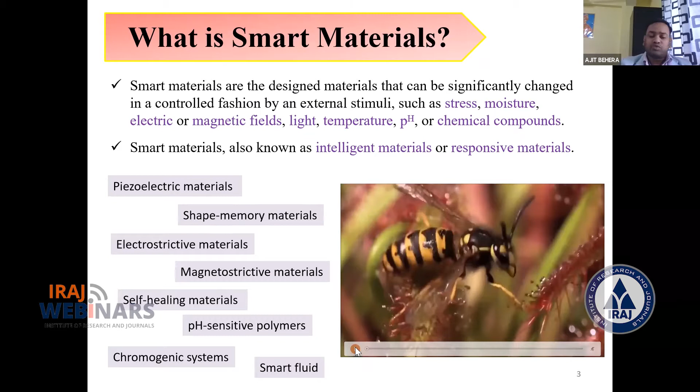Okay. So what is smart material? Just before the definition, I will show you a video clip here. You observe how nature gives an indication of the smartness of different types of material. So in this video, you observe that when there is a force or stress experienced by the surface of that plant, then according to that stress or pressure on the surface, it will close. Okay, that is called smartness. According to the force, it will close its petals.

The same thing will happen in the case of material, right? So as per definition, smart materials are designed materials that can be significantly changed in a controlled fashion by an external stimuli. Here in this video, the stress is an external stimuli. According to that, it will actuate. In the case of material, different types of stimuli are there, that is stress, moisture, electric field, intensity of light, temperature, pH change, and chemical compound. By these stimuli, the material will experience and actuate accordingly.

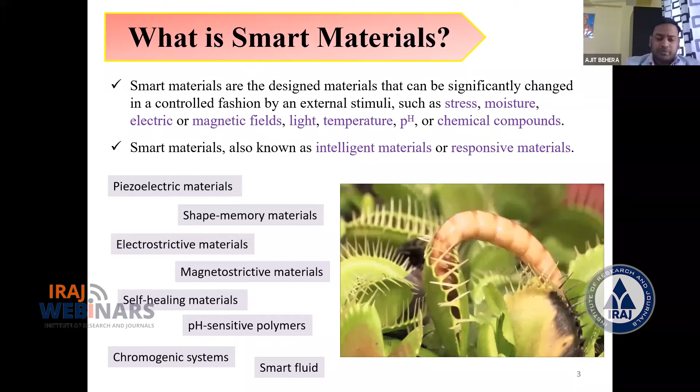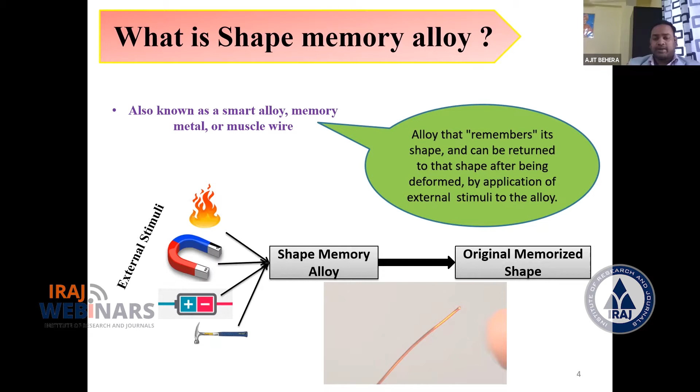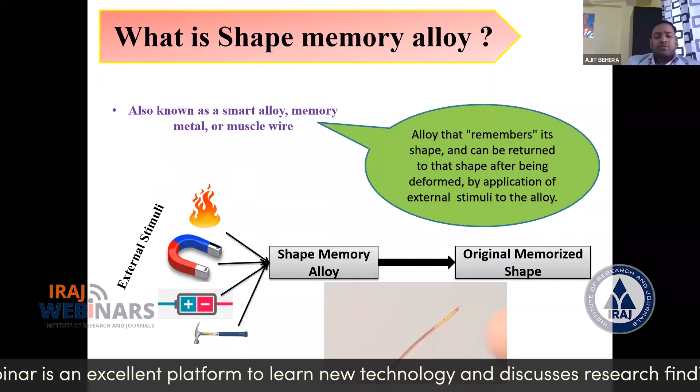So what is shape memory alloy? As its name, it memorizes shape. These are alloys that remember their shape after being deformed, by the application of external stimuli to the alloy. This type of alloy is also called memory metal, muscle wire, or smart alloy. Before going to the definition, I will show a video clip here: what is the difference between conventional alloy and shape memory alloy? Suppose we take a brass, and if we give force or deform it, then what happens?

Then it will be like that. But in case of shape memory alloy, if we deform the material, then it will come back to its original shape. This is a type of pseudoelasticity nature of shape memory alloy.

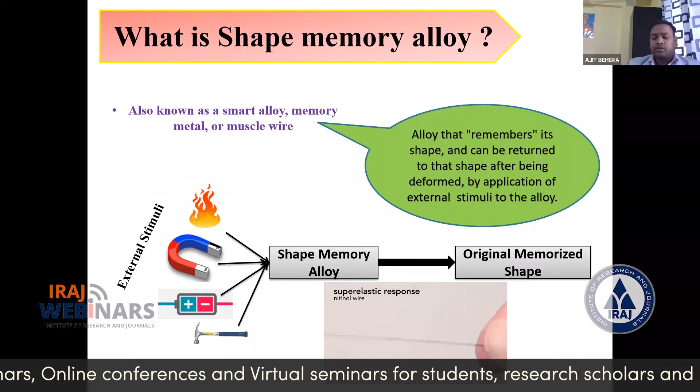Okay, here in this video, you saw that when you give some amount of pressure here, or we want to deform it, then it will come back to its original shape. Okay. This is the beauty of this type of shape memory alloy.

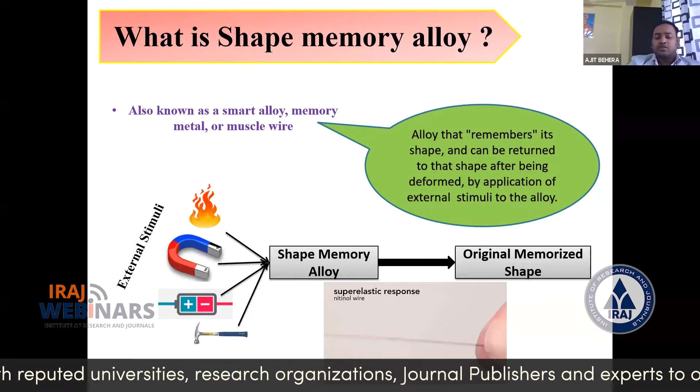So as per definition, shape memory alloys are the alloys where, if we give some amount of deformation, then to that deformed dimension, if we give some external stimuli, that is thermal energy or magnetic energy or electric energy or sometimes stress, by the help of this external stimuli, we can recover its original shape. Right. This is called shape memory alloy.

So, what is the potential property or function of shape memory alloy? Why are we not going to use different types of smart material? Because so many types of smart material are there, in the current age, all types of smart material are used in sensor and actuator applications, right? But why will we choose shape memory alloy?

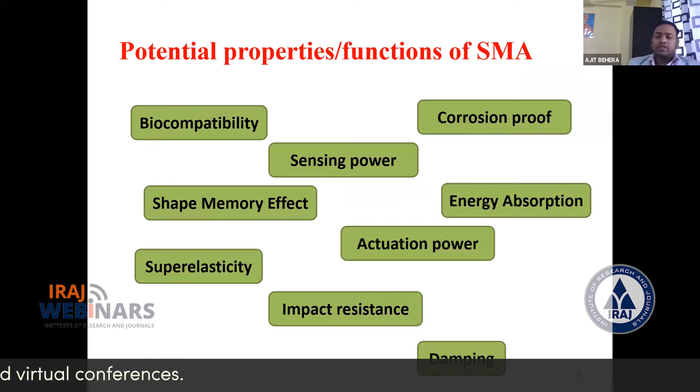Rather than other types of material, because of these advantageous properties. The first one is biocompatibility. Okay, shape memory alloy, the first one is biocompatibility. So most of the alloy is biocompatible in nature, because it will not produce any type of toxicity if you implant it in different types of biomedical applications, right?

And another one is corrosion proof. Most shape memory alloys have a composition such that they give better corrosion resistance property, right? It has better sensing power, and accordingly it will have energy absorption capacity. Accordingly, it will actuate. Okay, then it has high impact resistance, good damping property, right?

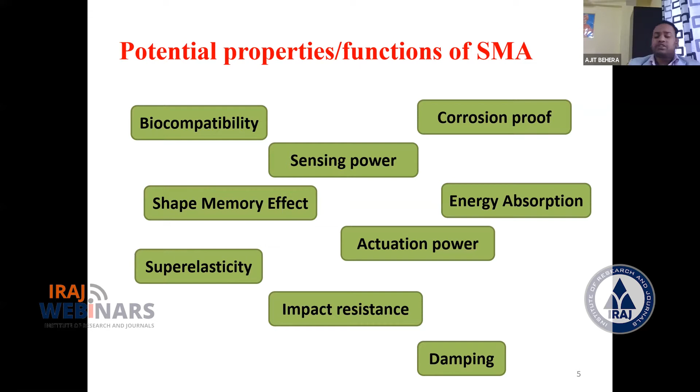And in addition to these properties, we can get two types of peculiar properties, that is shape memory effect property and pseudoelasticity property or superelasticity property. These two are the main properties of shape memory alloy. By these two properties, we can apply it in different types of application. We will discuss this in this presentation.

So as compared to other smart materials, when you compare actuation stress with respect to actuation strain, then you can get shape memory alloy here, right? So think about that. Why will you not go for shape memory alloy when the conventional smart materials are used?

Suppose I give you an example, that is in actuator application to produce some sound in a sonar transducer. There we can use piezoelectric ceramic type of material. But in that actuation case, if we operate with temperature induced or magnetic induced shape memory alloy, and we actuate the dimension in such a way that it can produce the desired frequency of wave, we can use it. Definitely we will get a better result, right?

So what is the main thing? What is the main principle behind the shape memory alloy, so that we can use this type of alloy in different applications? So here I will show you one application for shape memory alloy. Then according to this application, I will discuss the fundamental thing behind it. Right. You just observe here.

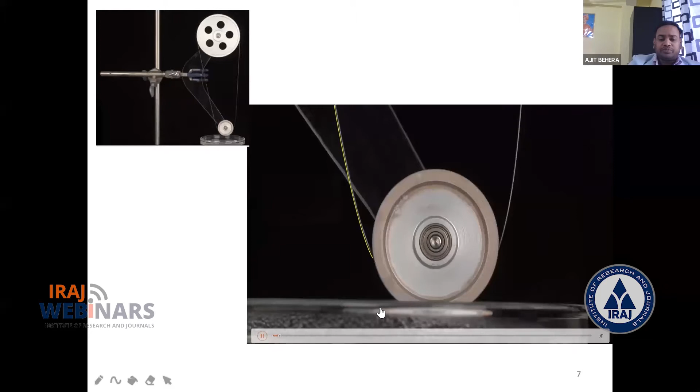So what happened with this type of material? Right, no other external source is there to rotate this wheel. Even so it rotates when it touches the water. What is the fundamental thing behind it? Right. So we'll go to the macroscopic and microscopic view of that wire, which is connected with these two wheels. Okay, what happens inside that material, so that without any source we can rotate a system.

So to understand that one, I will tell from the origin. Suppose there is a straight bar, a shape memory alloy bar. Suppose you can consider it is the original shape, right? And here you are deforming the material. Suppose in the second step you are deforming the material. This is the deformed shape, right? Consider this is a deformed shape.

So here you want to come back to its original shape. So how will we recover this shape? If it is a temperature-induced shape memory alloy, then you have to give heat as an external stimulus, right? So at a higher temperature, you will recover the structure, which looks the same as the original, but microscopically, when you observe, it is not equivalent to the original shape, right?

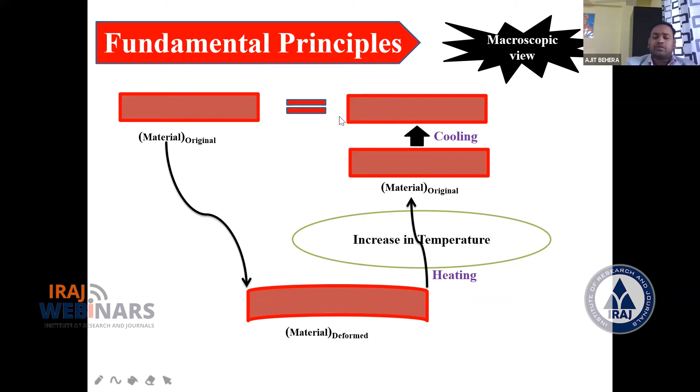Remember. So this hotter shape, in this step, you have to cool it. By cooling, you will get the same shape, but microscopically, it will arrange the same as the original shape. Now you can say the cooled shape is equivalent to the original shape. Okay. So what is the difference between this hotter shape and the cooler shape? Here we'll go to the atomic arrangement in this material, right?

Suppose this one is a low temperature, undeformed shape. You can consider it is the atomic arrangement in the original or initial shape, right? And the undeformed shape, in case of shape memory alloy, is always a martensitic structure, low temperature shape, martensitic structure. And in this martensitic phase, the atomic arrangement is just like a twin. You know, twin is a surface defect for conventional material. But here, in case of shape memory alloy, you can consider this atomic arrangement just like a twin-like arrangement, right?

And when we apply stress to deform this low temperature undeformed martensite, what happens? The atomic arrangement will again form twins, because the original or initial shape is a twin-like arrangement. Again we give deformation, again it will form the twin. So it will form this type of shape, just a rhombus type of shape. That is called detwinning, detwinned martensite. Because all the deformation we are doing without temperature; up to this step, we are not giving any type of stimulus. So at that low temperature, this is also martensite. So after deformation, the structure will be like a rhombus, right?

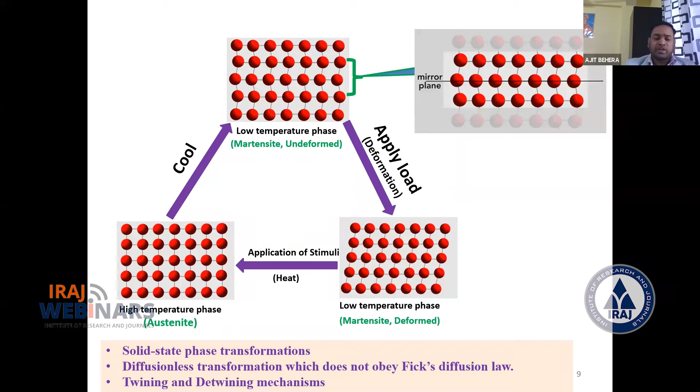One person's movement is equivalent to the surrounding persons' movement. The same thing happens in shape memory alloy, very coordinated movement. That's why it is called military transformation, right? Whatever I am showing here, in case of shape memory alloy, the atomic arrangement and atomic movement or displacement, everything will be in a coordinated manner. So here everything is explained by that. That is military.

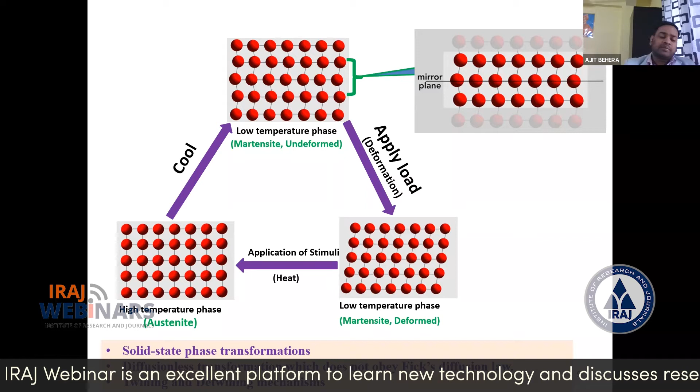And here no diffusion will occur, so Fick's diffusion law will not work here. And in this mechanism, the conversion from low temperature martensite to high temperature austenite, the twinning and detwinning mechanism will also play a big role. Right.

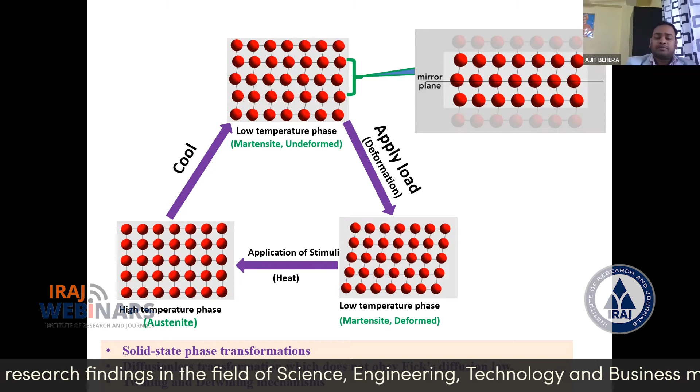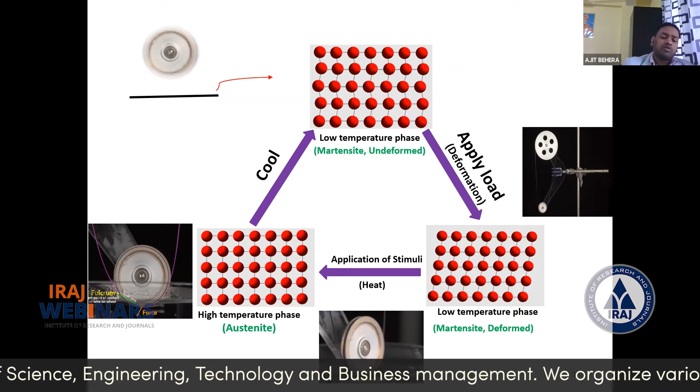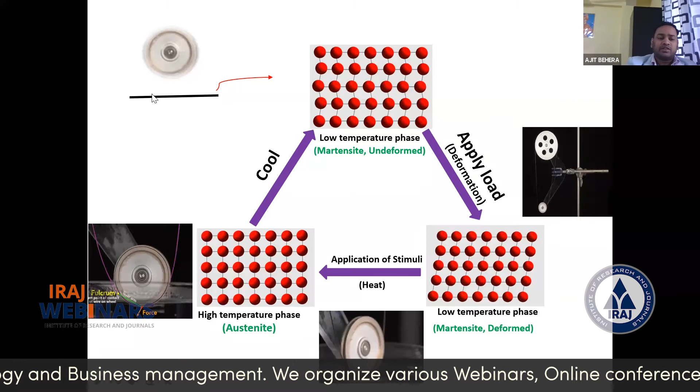So come back to that application. I have shown you how, without any external source, with the help of hot liquid, we will rotate a wheel. Right. So just compare. Suppose the shape memory alloy's initial shape is straight. Okay, initial shape is straight, and this initial shape is a martensitic phase. Okay, twin-like structure.

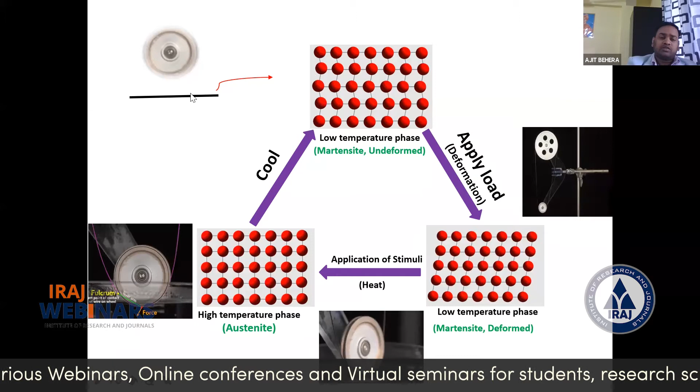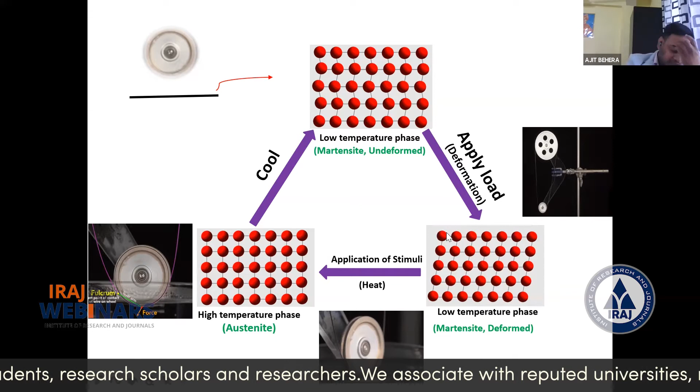And now you have to wind this wire with this wheel. So you have to deform it by applying load, and you will fix it in between these two wheels. Once you are deforming, suppose these are straight, but here and here it is in deformed condition. So it is a shear dominant transformation here.

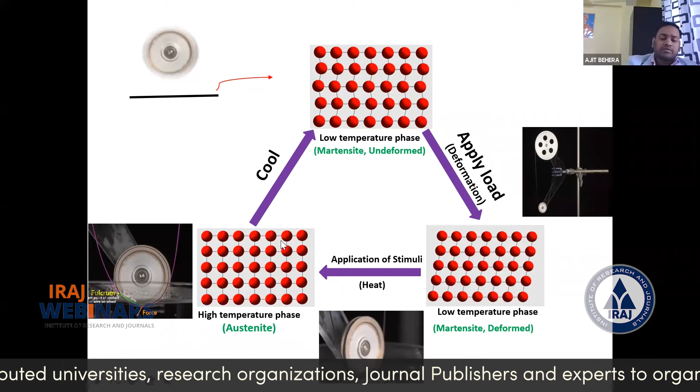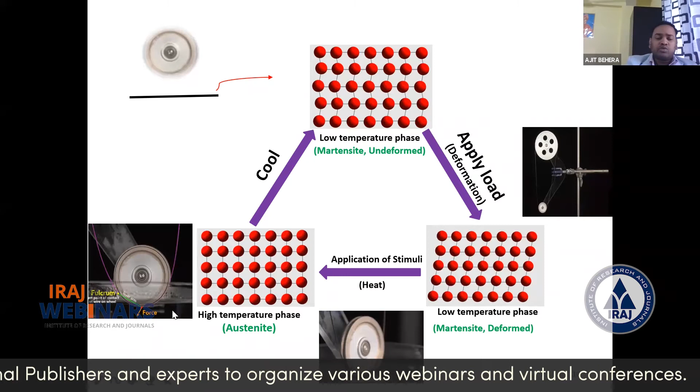And here, when it touches the external stimuli, that is temperature in the form of water liquid, then what happens at higher temperature? This shape will transform to the cubic shape. Once it forms the cubic shape, it will try to attain the microscopic dimension that is the same as that of the original shape. So it tends to become straight, right?

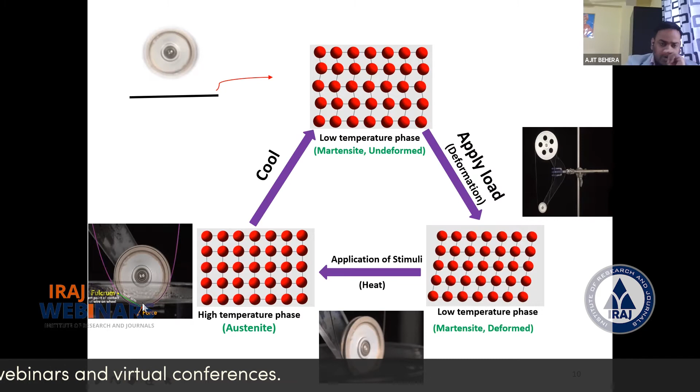So this line, when it is exposed to the hotter stimuli, wants to straighten. So it will pull and come to this side. Sequence-wise, whatever portion comes in contact with the hotter liquid medium will go in that direction to become a straight line. So in this way, we can rotate the wheel. This is the mechanism of shape memory alloy.

So whatever deformation you give for different applications, it will rotate towards the left side or right side according to the deformation or structural arrangement of that system. Whatever external stimuli you give, as temperature, it will form this cubic shape. Okay, it is final. After that, it will straighten.

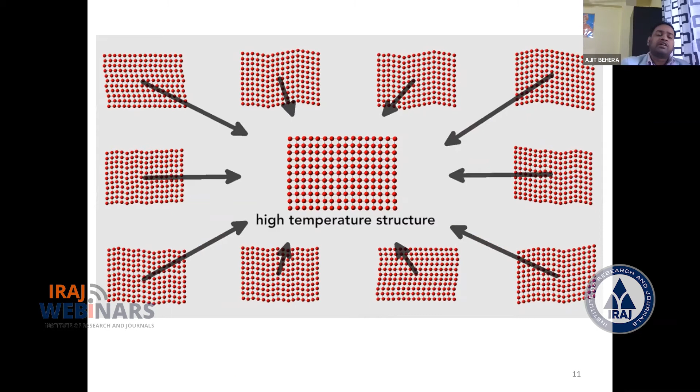So here it is the high temperature phase, that is austenite, and this is the low temperature phase, martensite. The shape change, this actuation mechanism, straightening or coming back to its original shape, all of it happens between the high temperature and low temperature phases, austenite to martensite or martensite to austenite. Right.

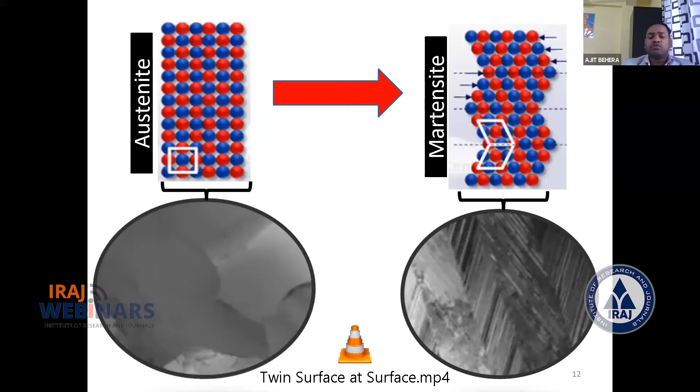What happens for a shape memory alloy in the case of pseudoelasticity or superelasticity behavior? Suppose its initial shape is one phase, and by giving stress, it will go to another shape. Again, it will convert back to its usual shape. Okay, I will show you a video here.

This is pseudoelasticity nature. This is smooth, that is the austenitic phase. Then when you give pressure, it will form the martensite phase. Again, by relieving stress, you will again get a smooth type of surface. Okay.

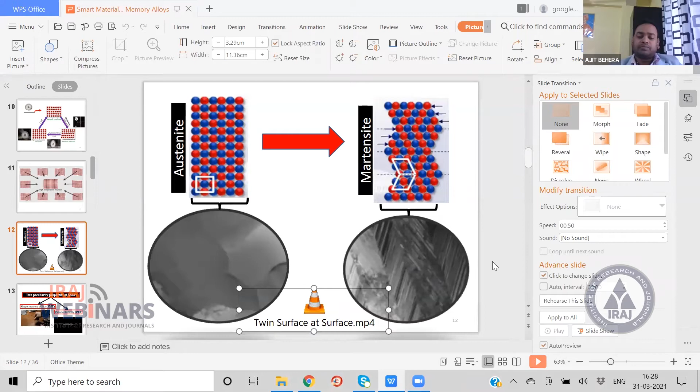So another peculiar property of shape memory alloy we'll discuss here, that is shape memory effect and pseudoelasticity, also called superelasticity. You can observe these two properties in different applications of shape memory alloy. What is shape memory effect? What we discussed in the previous slide is shape memory effect. After deformation, when you give some external stimuli, it comes back to its original shape. That is called shape memory effect.

What is superelasticity? Another behavior. For this type of application we have to train the material for martensitic to austenitic transformation, and we have to maintain the working temperature just above the austenite finish temperature. At that temperature, whatever stress you give, it will change from austenite to martensite. Then it will come back from martensite to austenite.

Okay. I will show you some video of these two properties. Then again, I will discuss how these two behaviors are distinguished by the stress and temperature diagram. Then it will be better to understand.

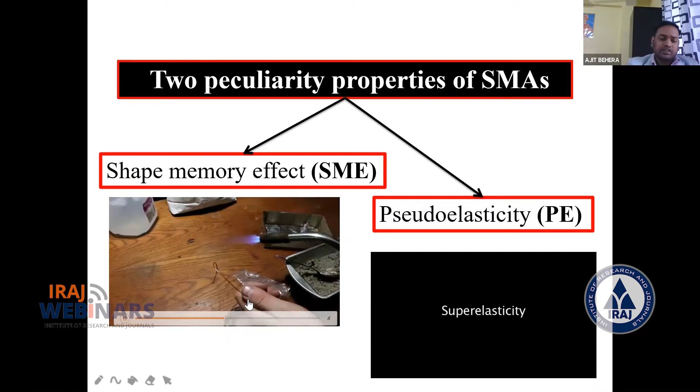For shape memory effect, suppose this is the material. He deformed the material, and externally he will give some heat to recover its original shape. This is called shape memory effect.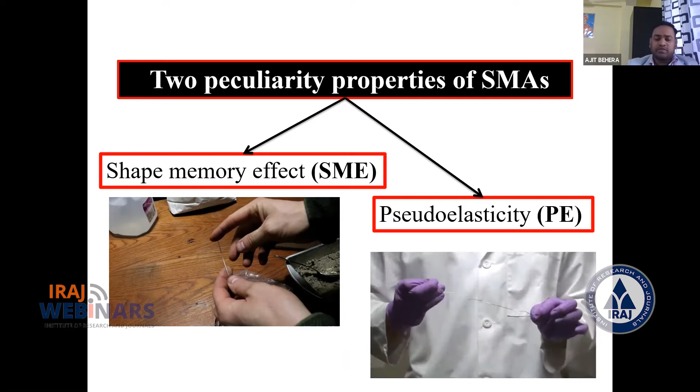But in case of pseudoelasticity, this is the shape. Whatever stress or deformation you give, there is no need of external temperature. Without external stimuli, it will come back to its original shape. This is called superelasticity or pseudoelasticity behavior.

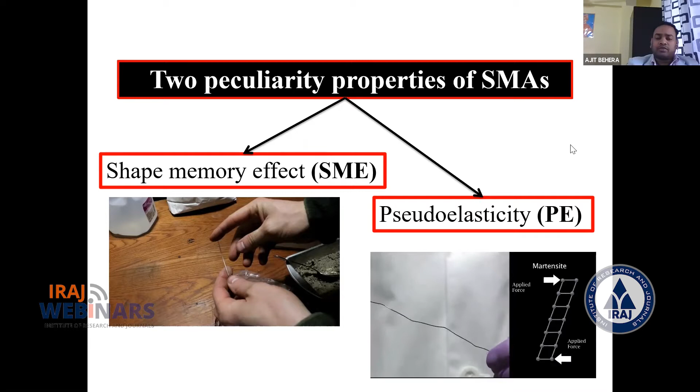Why does it happen? We will go to the stress strain temperature diagram, you can better understand here. So first we'll discuss shape memory effect.

Suppose this is the origin, and initially it is shape memory alloy, and the original metallurgical phase is twinned martensite structure. So here we will give some amount of deformation, some amount of stress to deform it, and it will follow this path, like a conventional material, and it will form a shear dominant transformation.

That is detwinned martensite, which is in stress condition. When you relieve the stress, it will come to this point, the detwinned martensite, unstressed condition. So here we have to think how to recover the material, because in the stress strain diagram, once we give the stress and follow this path, there is only a very small recovery after relieving the stress, as in a conventional material.

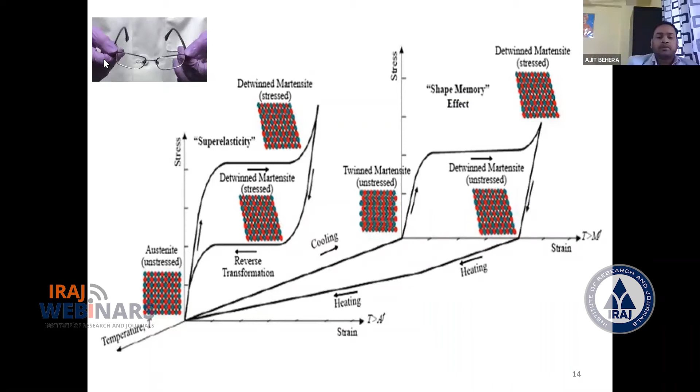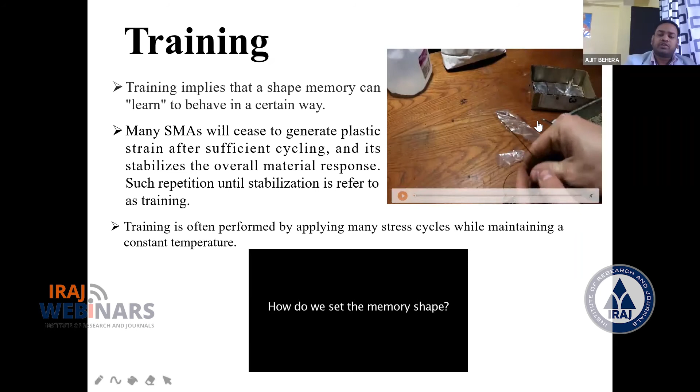Then we will cool it, and again we have to repeat this procedure so that it forms the original shape. We make the original shape here, and after deformation, by giving a small amount of heat, it will regain its original shape.

Another example is here. Suppose from a straight bar we have to keep this structure, the star-like structure, as the original shape. So we'll put it inside the furnace and increase the furnace temperature. Then we'll put it in a cold medium.

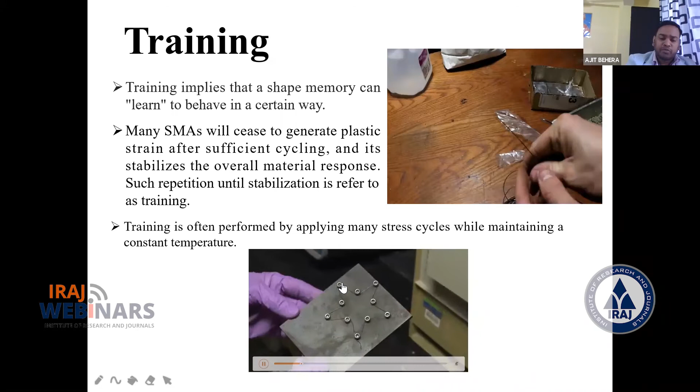Again and again, we have to do this procedure to measure this angle. Suppose this angle, whatever we'll fix in that board, this angle we have to maintain. We will keep it in the furnace, cool it again and again, and do it by removing this shape. If it maintains that angle only, then we'll say it is already trained. Otherwise, we have to follow this procedure of heating and cooling in that loading condition. So we have to train in this way.

One thing is that shape memory alloy will cease to generate plastic strain. The main aim is to cease the plastic strain after sufficient cycling, and it stabilizes the overall material response. Such repetition until stabilization is referred to as training. What is stabilization? We have to cease the plastic strain. So training is often performed by applying many stress cycles while maintaining a constant temperature.

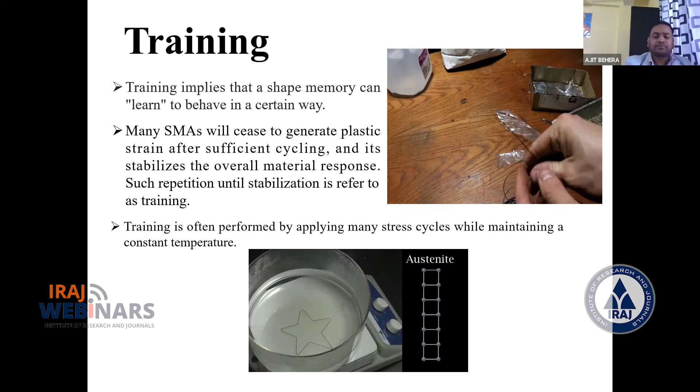According to this training procedure, we can categorize shape memory alloy into two types: one is one-way shape memory alloy, and the second is two-way shape memory alloy.

In case of one-way shape memory alloy, the material can remember only one shape. Because this is the initial bar, we'll deform it, then by giving temperature after cooling, we'll maintain the same shape.

But in case of two-way shape memory alloy, we will severely deform it. After that, it will remember a heated shape, and at lower temperature than the previous one, it will also maintain another shape. So two types of shapes it will maintain, at two different temperatures. So that is called two-way shape memory alloy.

There is a training procedure for how to make this one-way and two-way shape memory alloy. I will show here. Suppose in lab scale, you can also train the material. You can take some plaster of Paris and this shape memory alloy spring. Suppose this is where you have to make a structure, your predetermined structure. You will keep it inside this plaster of Paris, then you will dry it. After drying, you will put it inside the furnace.

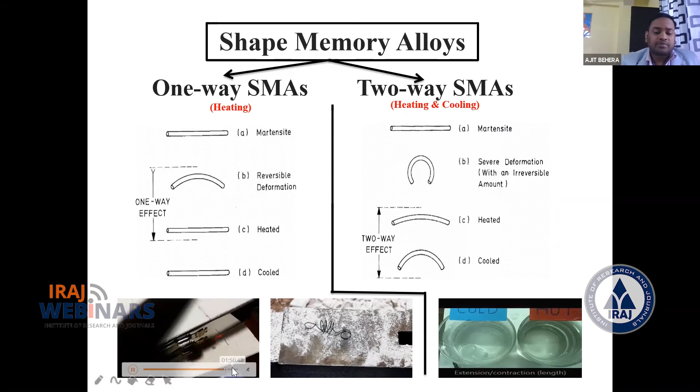I'm showing you, you can use this in your lab scale. At last, you will get a shape after removing it from that solid material, that is the trained shape memory alloy. You will break it, and we have got this shape. After deformation, he tries to deform it, and by giving some external stimuli, it will come back to the original shape. This shape he tried to make here.

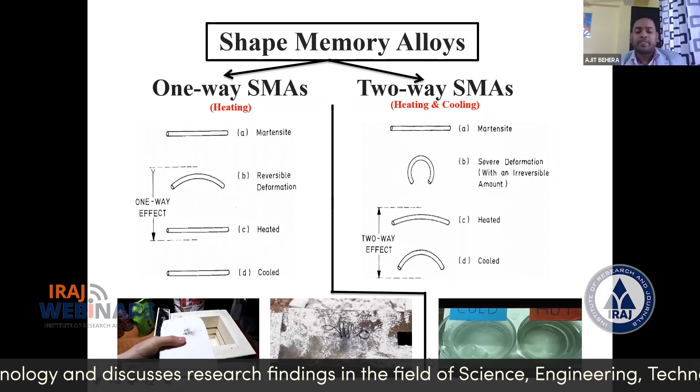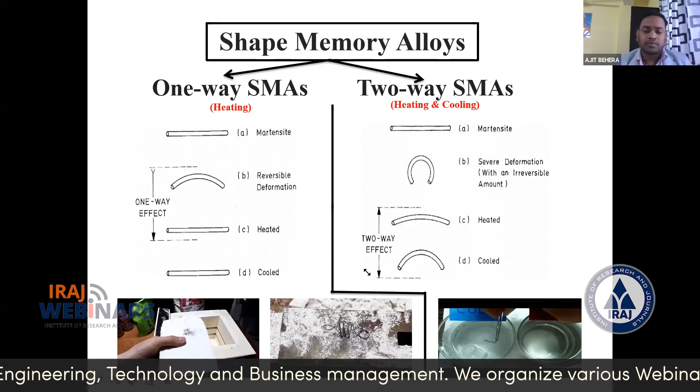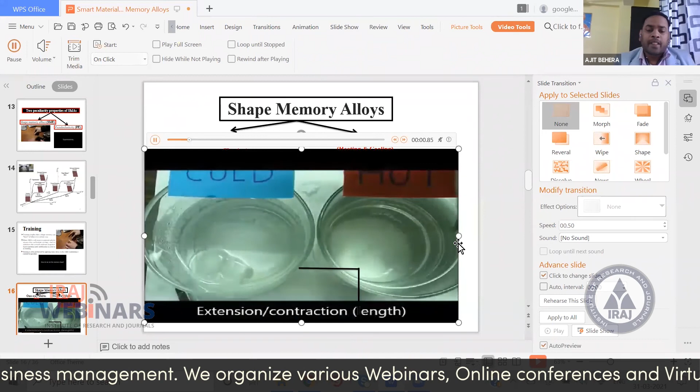In case of two-way shape memory alloy, what happens? Suppose this is a cold medium and this is a hot medium. Suppose this spring, you can observe - here, you can see the length of the spring. In the hotter medium, it is squeezed, and in the cold medium, it is expanded. So two types of shape it can remember.

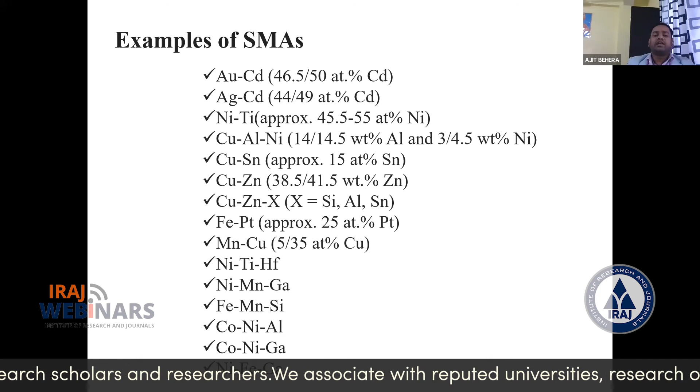So first thing we observe is that after fabrication, shape memory alloy training is a must to attain the shape memory effect and the pseudoelasticity behavior. Another thing is that...

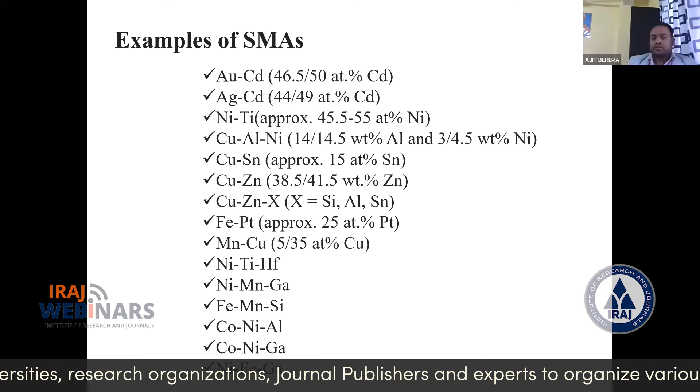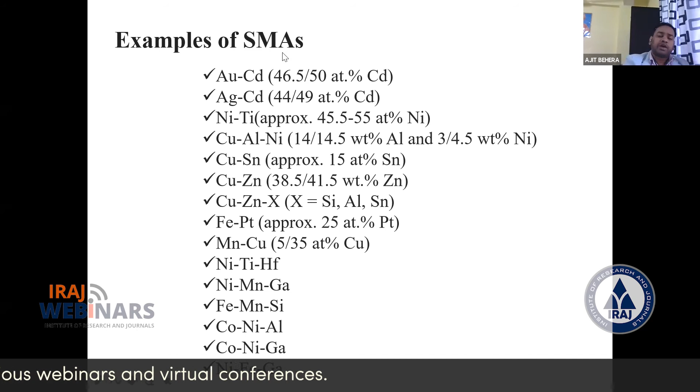You have to make a temperature-induced shape memory alloy using gold and cadmium. But whatever atomic percentage you take, it will not give shape memory alloy property unless you take a particular percentage. In case of gold cadmium, you have to take 46.5 to 50 atomic percentage of cadmium with balanced amount of gold. With this composition, when you fabricate and train the material, you will get shape memory alloy property. If you go beyond this limit, you will never get shape memory alloy property.

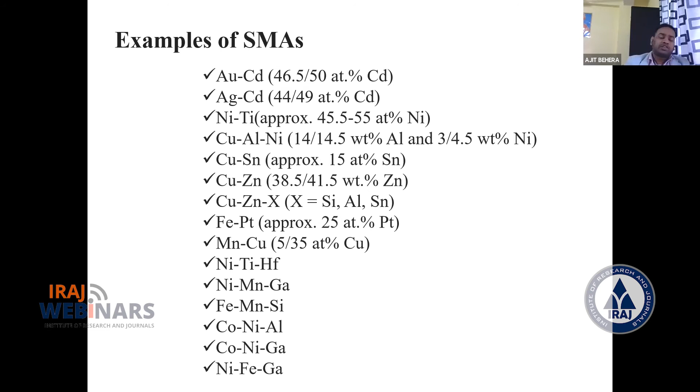Remember this, because another commercial temperature-induced shape memory alloy is nickel titanium. If you take nickel 5% and titanium 95% and call it a nickel titanium alloy, it will give just shape memory effect property, but it will not give that property in this composition. So you have to take nickel in the 45 to 55% range, with balanced amount of titanium. So for shape memory alloy fabrication and training procedure, you will also keep focus on this composition.

So these are the different examples of shape memory alloy.

And now we will go for industrial application. How this principle and this training procedure can be used in different types of applications. Here I will discuss only emerging applications.

First is force actuation, used for rock hardness measurement on different planets, used in rover, rover wheel, solar panel opener, asteroid damper parts, satellite detachment, temperature control system, cryofit tube coupling, biomedical stents, dental wire, bone fixation, eyeglass frames, and blood clot filters. In these emerging fields, we can use shape memory alloy in comparison to other smart materials. We will discuss one by one.

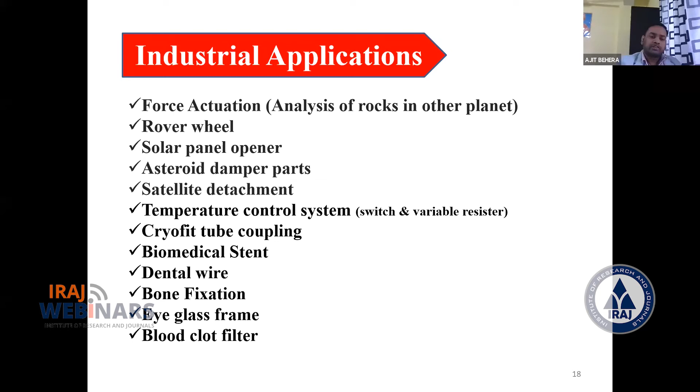Force actuation is of two types: unconstrained and constrained, used for rock hardness measurement mechanisms. In unconstrained type, it is the initial shape, we stretch it and fix it in a flexible line or wall. Then by heating, it will come back to its original shape, recovering shape without exerting any force.

In constrained type, we stretch the material and fix it in the fixed wall. When we heat it, it tends to squeeze to gain its original shape, so it gives some amount of stress, which is used for different purposes. Here I'm showing stretch tension type force, but sometimes compressive type force will occur. By fixing two sides, if it is not able to return to its initial shape, it will produce force used for different purposes.

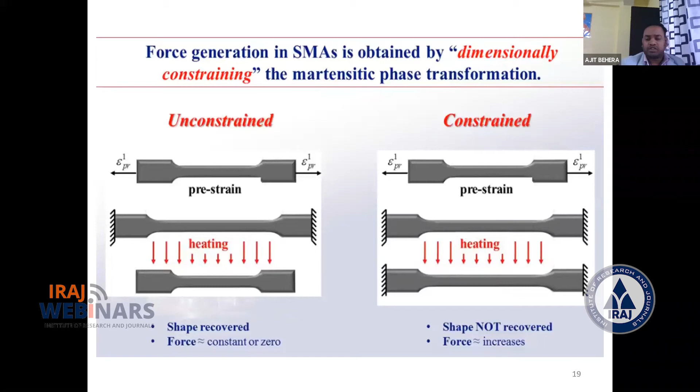For unconstrained type, it will easily recover the shape, and force produced will be zero or constant. For constrained type, force will gradually increase, because it transforms from deformed shape to the cubical shape.

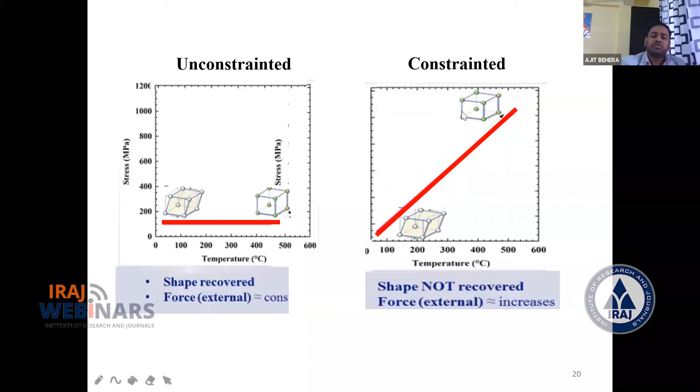The additional setup for measuring rock hardness on different planets by SMARS project works like this: this is a tube inserted inside the hole, and these are the shape memory alloys, which may be single or multiple type, with a heat-operated mechanism associated with a small control box. Inside this tube, the shape memory alloy capsule is inserted and wound with a temperature-induced coil.

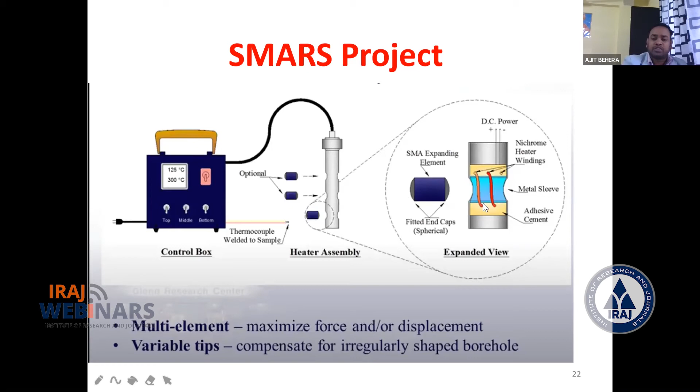The setup is like this: the rock sample is there, the rover drills a hole, then puts in this memory assisted device. By heating, through some electric operating device, it will indent and crack the surface, and at this time it calculates the hardness. The main part is the memory alloy, which is wound by different wire controlled by the device shown here.

The next application is the rover wheel. In conventional cases, when we send material to space, we have to choose very light and very thin material. This wheel has very little thickness, and when it moves in different areas of different planets, due to erosion this type of defect occurs, and stones get stuck with it, making easy movement difficult, so it is hard to operate.

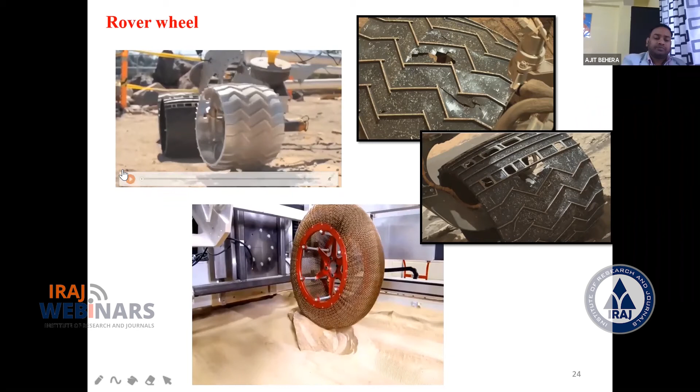This is the rover movement with this small thickness vehicle. Due to this problem, it is unable to take photographs or perform testing smoothly. So NASA already planned and developed this type of shape memory alloy wheel, which can operate on any type of surface for easy movement of this robot.

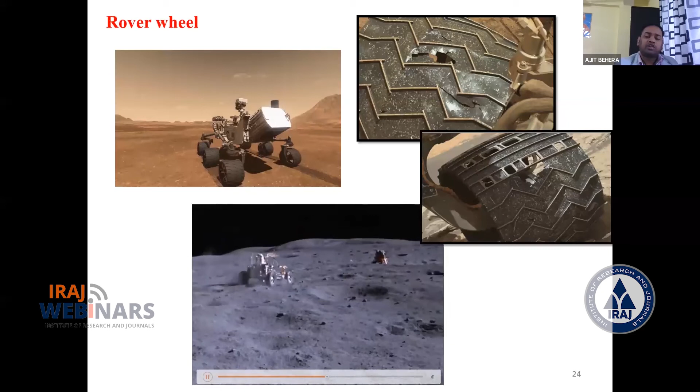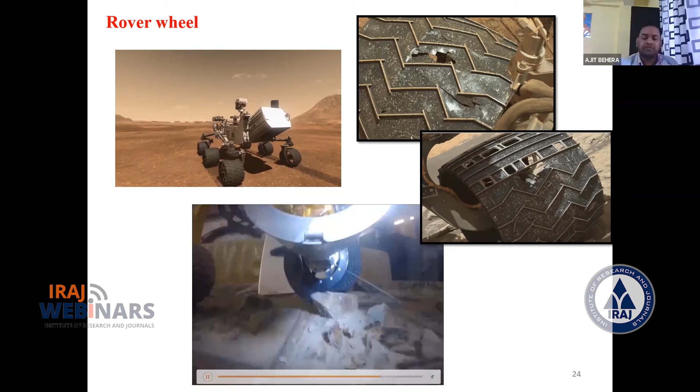How does it work? Just see this video. This is the wheel, and when it operates on different surfaces, it shows pseudoelasticity behavior. At sunlight temperature, it will not remain uniform, and it can go on any type of difficult surface. This is the beauty of shape memory alloy.

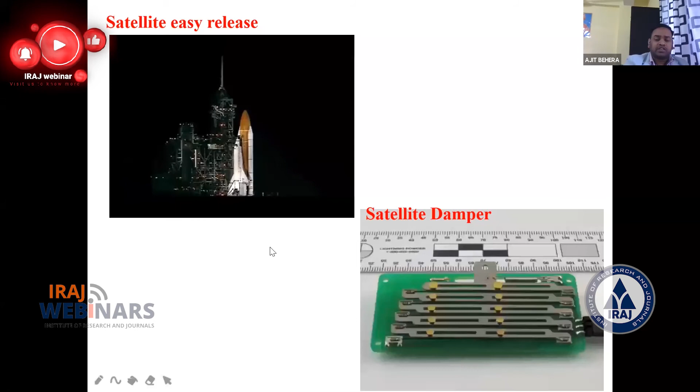Another application is the satellite hinge. The large setup that holds some equipment is hinged with the satellite, and during escape, when ignition happens and temperature increases, the setup opens up, allowing easy release of the satellite. Let's see here: there is a memory alloy hinge, and when temperature rises, it will detach, allowing easy escape.

Then satellite damper. In the satellite damper, you can observe a very small coil made up of shape memory alloy, operated in such a way that it absorbs the bombardment of high speed particles or large particles hitting the satellite. It then maintains and stabilizes the structure. This is how the damper works.

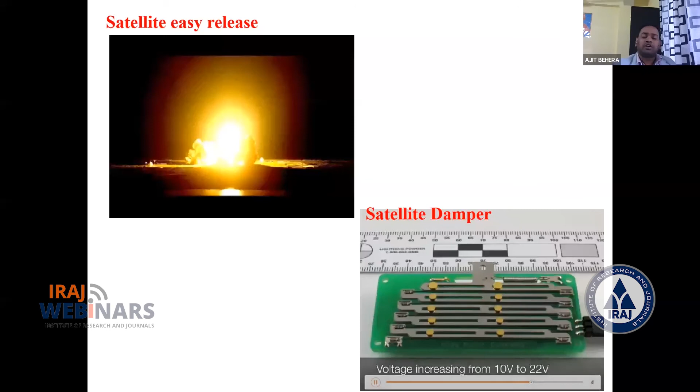Force will exert, then very slowly it will recover. Okay, it will not suddenly. It will not give reaction, because every reaction has opposite reaction. But when it will suddenly react, then structure will be unstable. In this case, this damper will minimize or it will maintain the stability.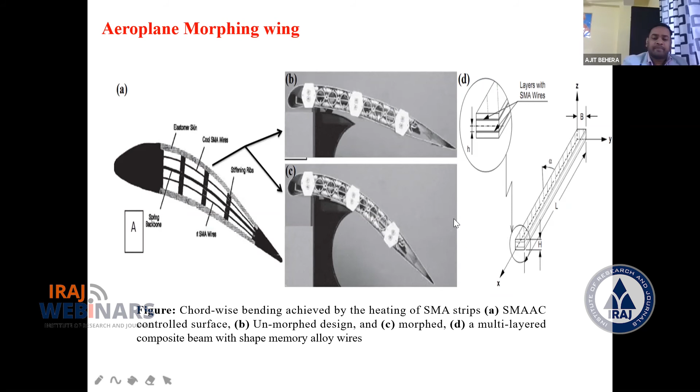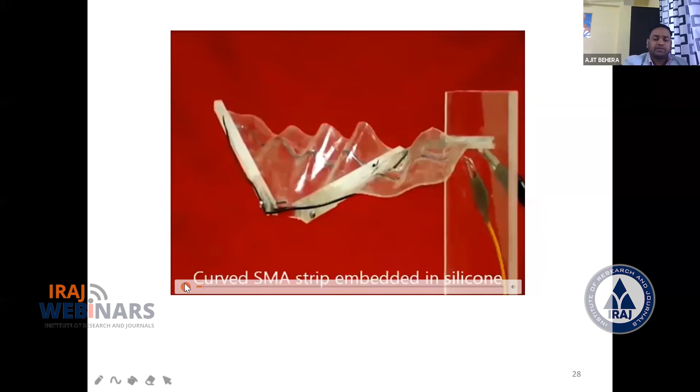And also by observing bird activity, scientists are also thinking about how we can actuate the total shape of the aero vehicle. Right. This is the shape memory alloy wired or netted shape. So the shape will be totally actuated by shape memory alloy. So this project is going on in MIT, to actuate the total body of aero vehicle, just like a bird.

And another commercial application is coupler. Okay, coupling agent, shape memory alloy coupling agent. In aeroplane, suppose aeroplane wants fuel, how to refuel it. So a coupling agent is required from source tanker to the required space vehicle, right? Nearly in the previous year, Rafale, you know all the data about that, because after 4 hours working, how refueling in air is possible. With this type of coupling agent, it is possible very smoothly.

Memory alloy is in between this, and by temperature, higher temperature and low temperature, the shape memory alloy is here. We can use it to connect the tanker to receiver nozzle and easily actuate in such a way that it will use a coupling agent to refuel it.

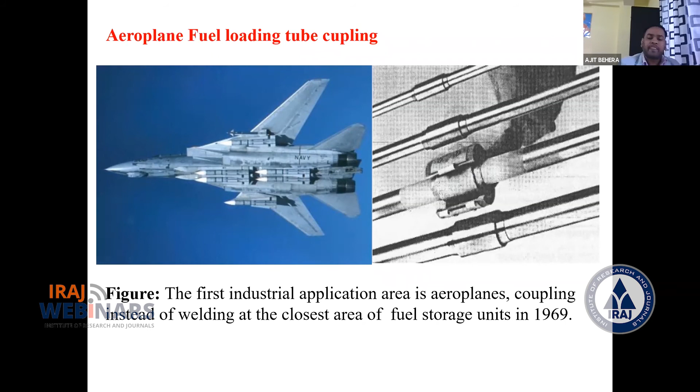Another one is satellite antenna. In military application on space vehicle also, that contain very small amount of antenna, you can squeeze and you can hold it in your hand also. Right? Very small volume. But when it will expose to sunlight, when it is required in case of space application or space station, then it will open up to a larger one, and easy communication will be there, right? And also in some military application, they are using it in trench area.

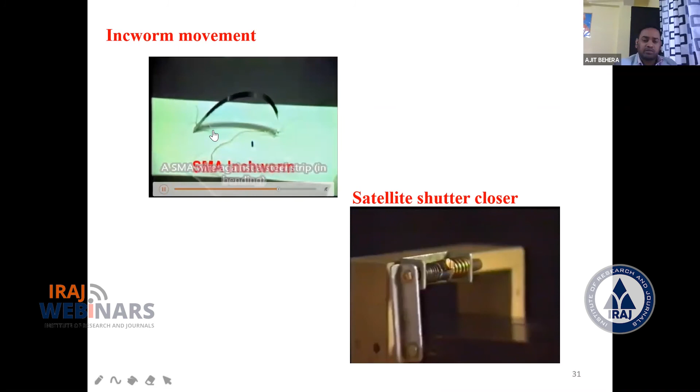Then locomotive, the inchworm type of application, shape memory alloy also used. Here you can see this is a shape memory alloy part, and temperature is induced at high temperature. It will expand, and the structure is like this. If it will expand, then the weight is like this. It will go forward. Okay, it will stable here, and it will come back. So in this way, the locomotion will be there. The structural arrangement and actuation of stimuli will apply. It's the best application to move the robot also.

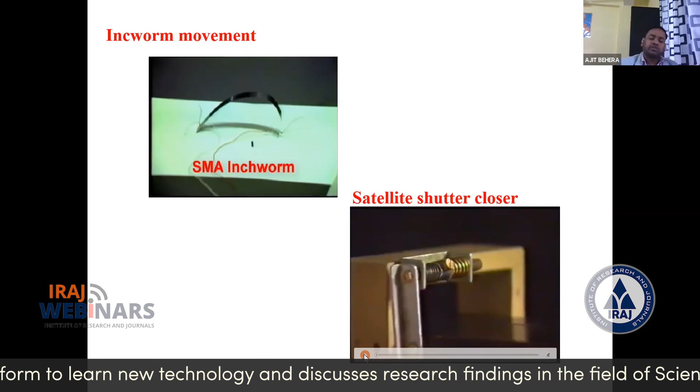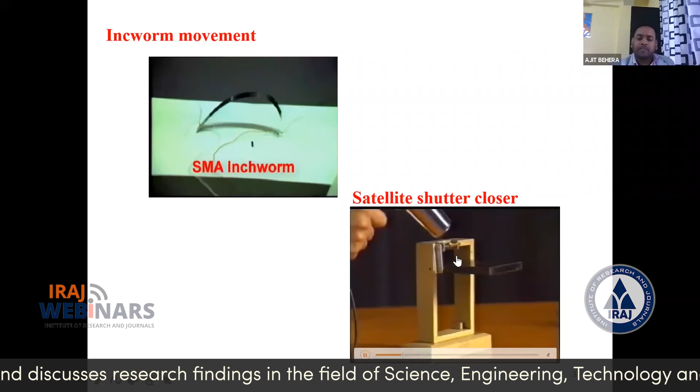Then satellite shutter closure. In some satellite that is operated by temperature only, when it will open up, then how to close? There is a shape memory alloy. Okay. It is a laboratory scale. When it will heat it, it will close. Okay.

Then biomedical stent. In this current age, so many are suffering with cholesterol problem, also blood pressure. What is the reason? The reason is cholesterol and blockage of blood passage. Right. Just look at this picture. Due to this cholesterol deposition in blood vessel, the movement of blood is very high, and high blood pressure will be there. So there is a different problem. So how we will avoid it? There is a technique, that is stent, we can use there to regulate the movement of blood.

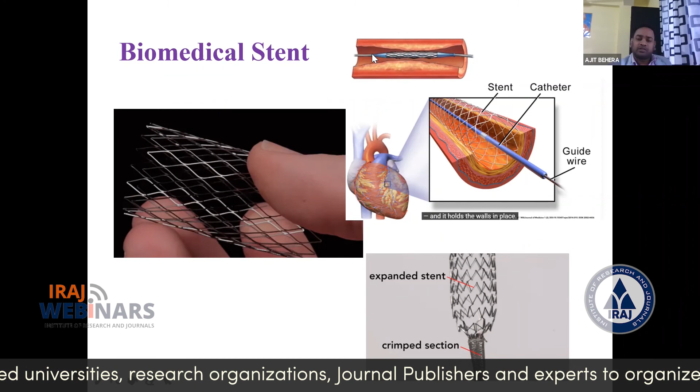So this is the shape memory alloy stent. So initially we will deform it, or we will squeeze it just like this section. And when you put it inside the blood vessel where passage is very low and creating a high blood pressure, by getting body temperature, it will open up. Okay, it will open up and squeeze this part, and the diameter will be open for good blood passage. So easily we can maintain the blood flow. Okay, this is the beauty of this biomedical stent. This is mainly in market. It is available in nickel titanium, nickel rich nickel titanium shape memory alloy.

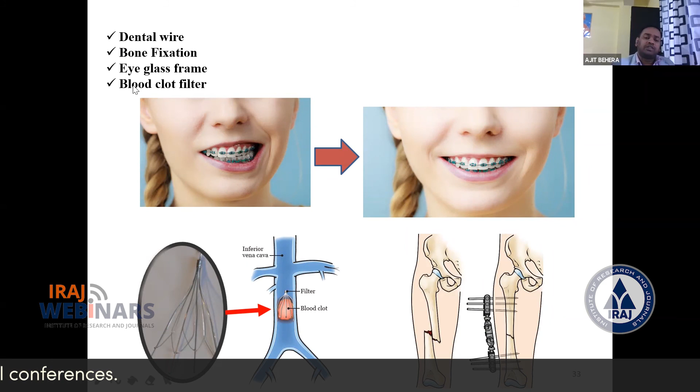Dental wire, bone fixation, eyeglass frames, blood clot filters: all of these are also made of shape memory alloy. Here there is a dental wire. Initially, the doctor stresses it in such a way that it will fix to the two sides of the teeth. Then, by gaining body temperature, it gradually tends to straighten itself to its original shape. So gradually, by gaining body temperature, it will straighten. At a particular time interval, we have to remove it to align the teeth.

To fix the bone, when an unaligned bone is there, if it is not possible to fix it in a conventional way, then we'll fix a shape memory alloy type of material. Then the structure will be like this. It will recover the shape accordingly. So with respect to that shape recovery, we have to maintain the shape of that bone or join the bone.

Then blood clot filter. Also, we can use shape memory alloy to hold the different foreign substances or unwanted substances, right, or blood clots. We can hold them. We'll put it out by giving temperature. It will open.